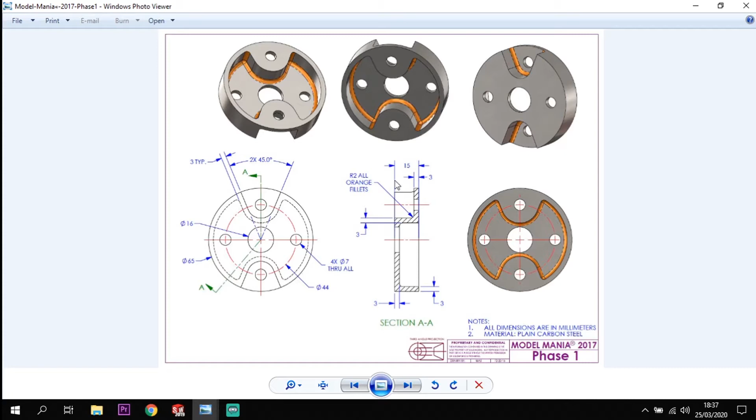So the first thing I'm going to do is do the extrusion for this main body section, this cylinder section. And then I'm going to put in my cutouts and I'm going to pattern them across. I am then also going to shell this main section out here and then put in my 4 holes as a circular pattern as well. So let's have a look. We'll jump into it and get going straight away.

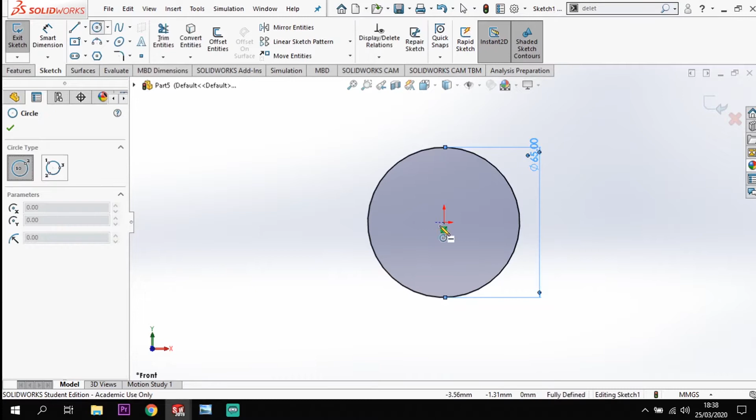Okay, so I'm going to start on the front plane. I'm going to sketch on there, and I'm going to create a circle. Now that circle is going to be 65 diameter. And I'm going to create another circle inside that, and that circle is going to be 16 diameter. So I'm going to extrude that, and I'm going to set the thickness of the extrusion to 15 millimeters.

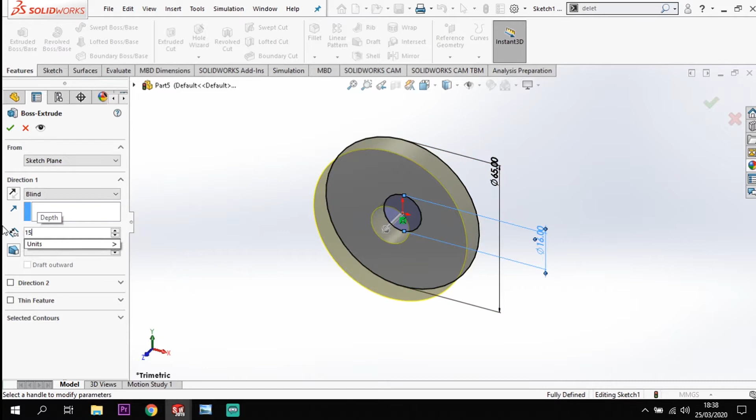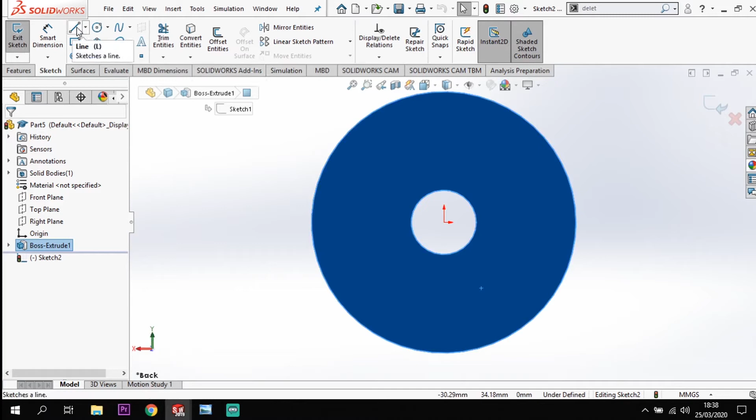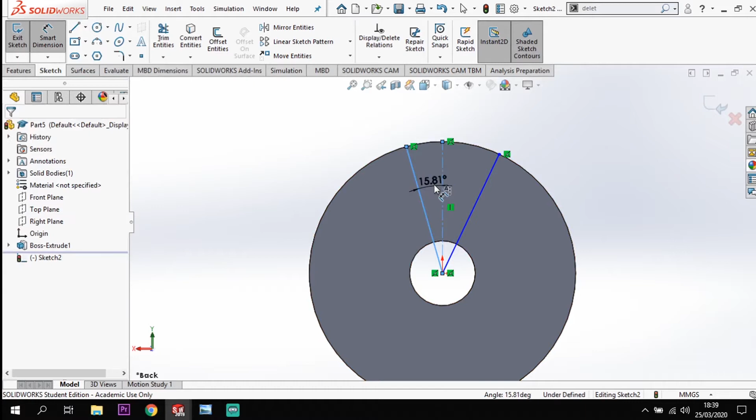Now with this I'm just going to flip it round, and on the back here I'm going to sketch, and I am going to create the cutout in here. So the way I'm going to do that is using 2 lines from the centre up to the outside edge. Same here as well, up to the centre, up to the outside edge. I'm going to set a centre line in there from straight up to the point at the top of the circle, like so. And then I can dimension these up for the angle. Now the 45 degree between the two, so it's 22.5 for one. And then between them is 45, and that sets that distance across.

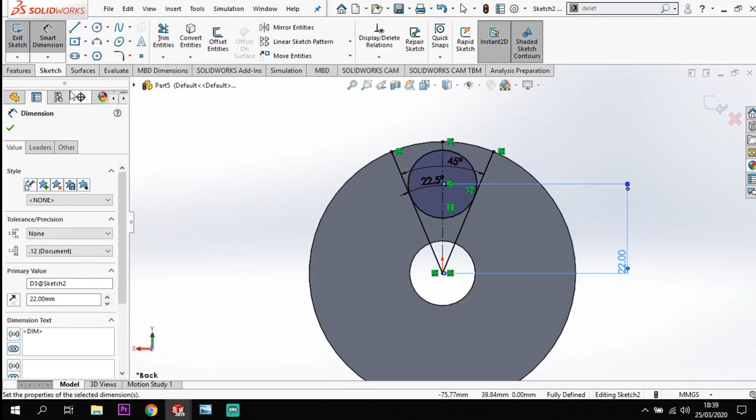Now I'm going to take a circle, I'm going to put it on this centre line, and I'm going to go out until it's a tangential relationship, like so. So I don't need to set the diameter, all I need to know is the distance up from the centre, which in this case is 22, like so. Now I've got that detail in, I can cut that shape out using the contours. So I don't need to delete anything.

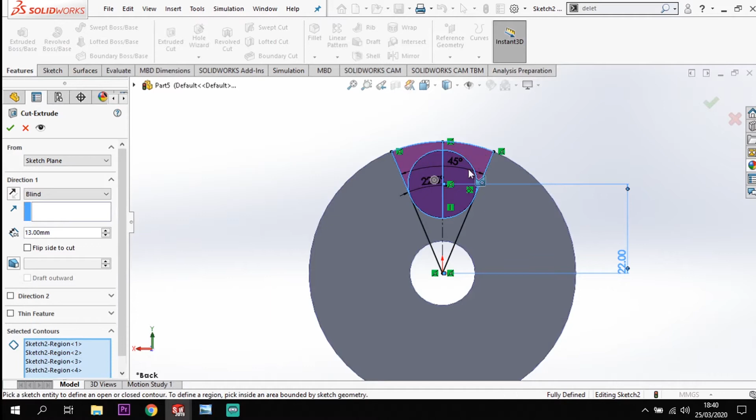I can go to features and I can go to cut. And I am going to select some contours in this bottom box here. I don't want it to be 15 anymore. I want it to be 13. And I'm going to select the contours that I want to get rid of. So them there. Turn that around and you can see that it's gone back into the model. Tick that like so.

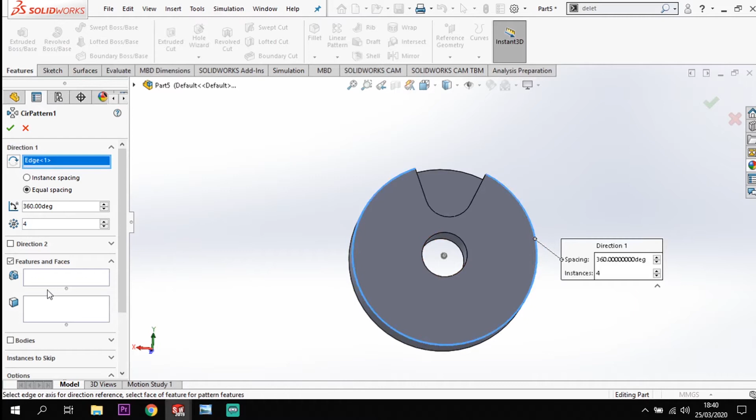Okay, I'm then going to pattern that to create the second one at the bottom. So, circular pattern. I'm going to pattern it around the outside edge, and I'm going to select a feature here of that extrude that I've already completed. Now I don't want 4 of them, I just want 2, so I'm just going to drop that down to 2. Make sure that they're equally spaced, and that'll split them apart exactly halfway, 180 degrees. Tick there, and I get that pattern on one side like so.

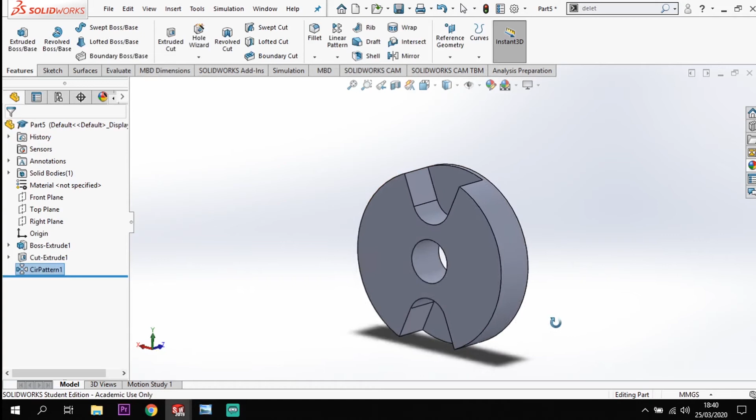I'm going to come around the other side, I'm going to click on that face, and I'm going to shell the other side. So shell, and I'm going to shell it with an offset of 3 mil. So the thickness of the material left over would be 3 mil. Tick there, and that'll shell that shape out. Now what we saw on the model before is we didn't have this, it was shelled all the way through. So I'm going to get rid of this.

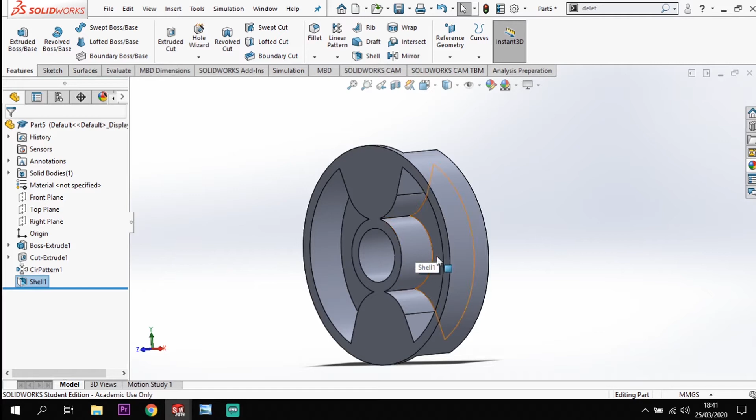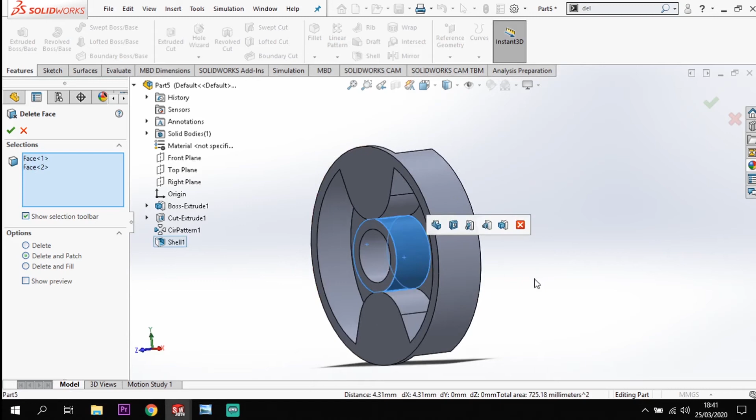Now I'll do that by deleting the faces. So if I go into my top box up here, I can delete, and I can delete a face. Now it is in there somewhere, I can never remember where it is, so I always just search for it at the top here. I'm going to click the faces that I want to delete, that one, and that one, like so. And I'm going to delete and patch, which means the bottom of this circle will patch around here. Tick there, get rid of that section in the middle, and that gives that flat surface at the bottom, like so.

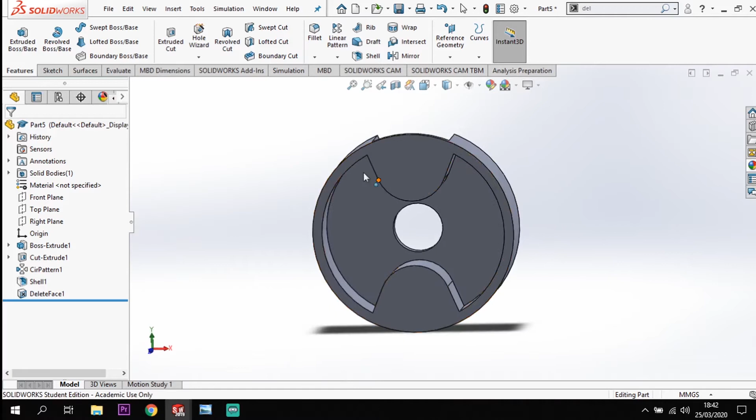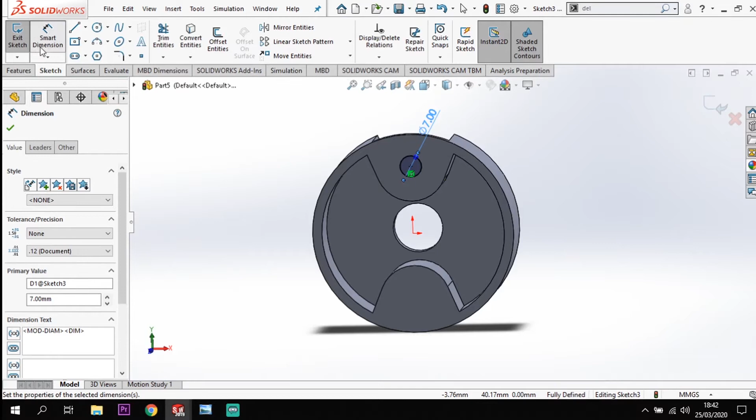Okay, so the last part to this for my extrudes is to put some holes in. So I'm going to go to sketch. I'm going to sketch on that face there, create a circle from the outside edge, and tick there at the top, like so. Now this is going to be a diameter of 7mm, so 7mm, and from there I'm going to features and cut that through.

Now I'm going to make sure that I select through all as my option, because I want it to go through the whole model to the other side, like so. Okay, tick there. So I've got that one. Now I'm going to repeat that around using the circular pattern. So circular pattern.

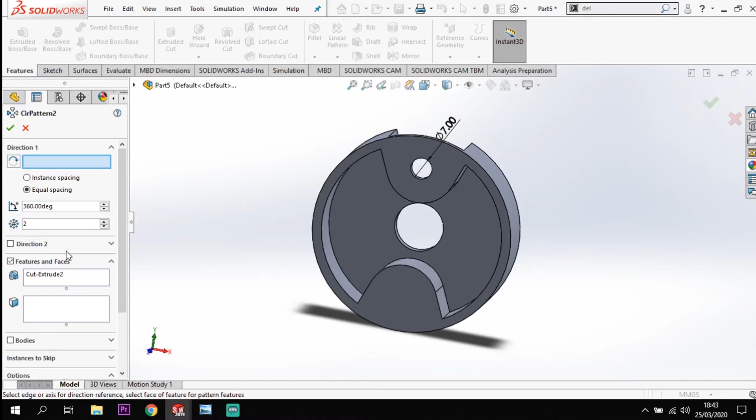It's automatically picked up that cut extrude because it was still selected in the design tree. I now want 4 of them, so change that to 4. And I'm going to click this outside edge here to get them all in place. Let's give it something to circular pattern around, which is giving me them 4 holes.

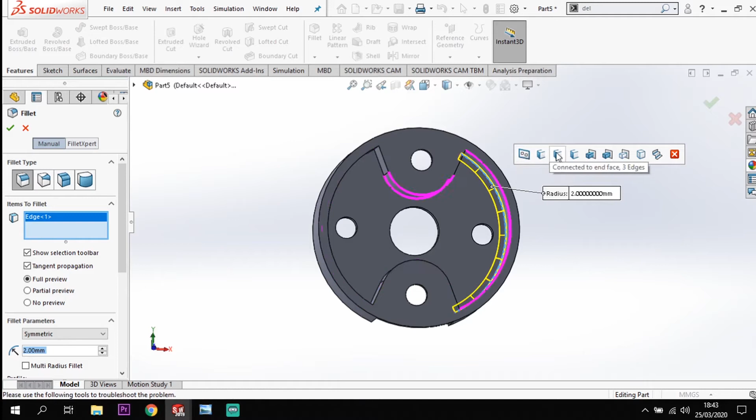Last part is just putting in my fillet, so I'm going to put a fillet in. Now my fillet is going to be 2mm, and I'm going to select this inside edge here. Now what you'll see now is that I get a range of options come up here on my fillets. Now these are effectively predictions. The software's trying to predict what other type of fillets I might want with this.

Now I want to fillet the inside edges of this, but also the inside edges of the other side. So what I'm going to use is the one that looks like a set of steps, all concave. Okay, and it'll pick up all the sections in relationship to that. So click that one. It picks up all the lines automatically for me. Just going to turn that round so you can see. And it's picked up all the edges that I want.

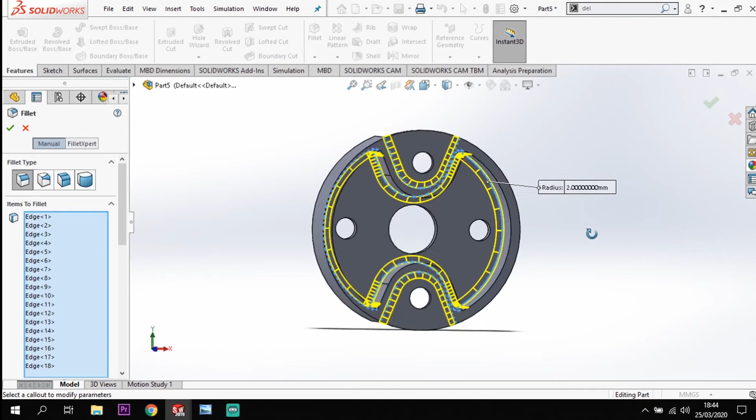Now if it doesn't give you the option that you want there, you'll just have to go around and click the lines that you want. It might give you most of them and then you just have to pick an extra few. But you should get quite a few from doing that prediction process. I'm going to tick there. And we've now got that model.

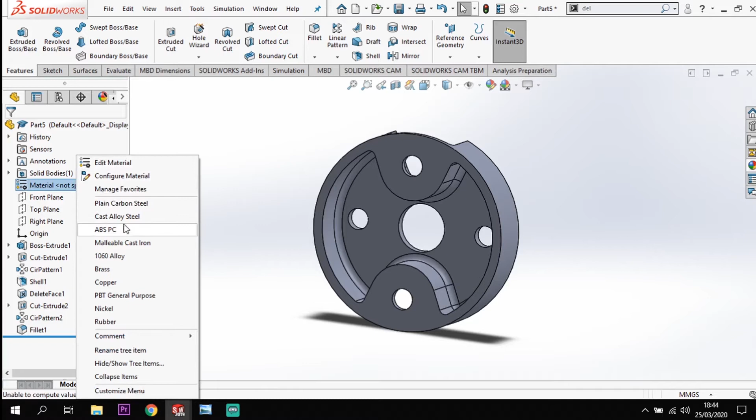The only bit now is to just put a material to this. So I'm going to go to material here. I'm going to edit material, but in this case, because this is a Model Mania model, anything that is used on Model Mania is always in the favourite section here. Now this material is going to be plain carbon steel. So I'm just going to select plain carbon steel for this model.

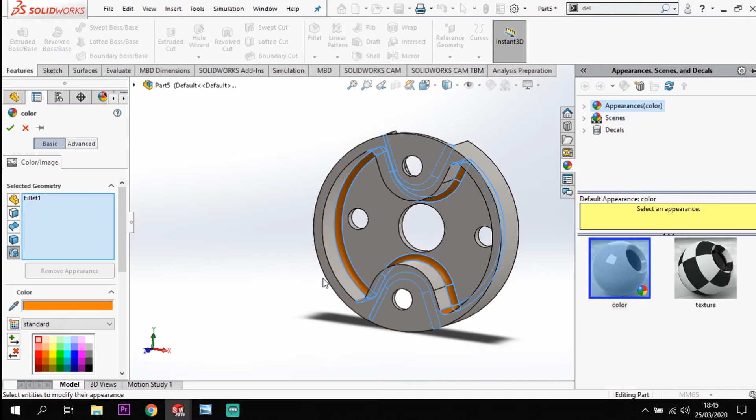I'm then going to pick the fillet just to highlight them. It's the same way it is on the model, and I'm going to select the fillet. And I'm just going to change the colour there to that orange colour that we get, like so, and tick. So you can see all of the fillets there are now in orange. Okay, so that's section 1 completed.

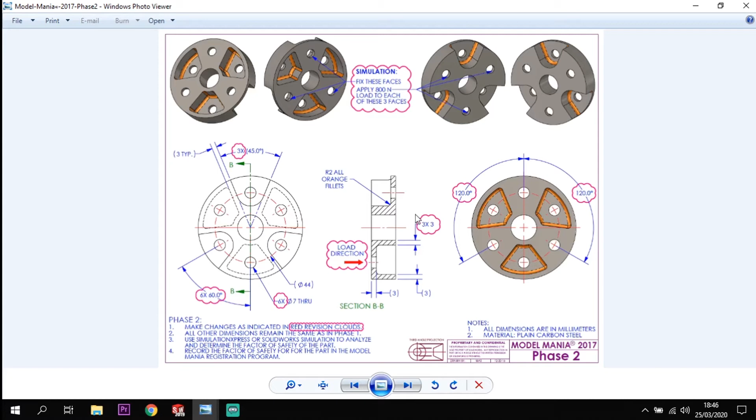So section 2 here looks at the modifications we need to make to this model. So now rather than having the 2 grooves in here, we're going to have 3, and the same on the other side. Rather than having that one large shell, we're going to have 3 sections. So we'll have to have a look at that. The holes increase from 4 to 6, and we're also going to do a simulation on this product, so we'll have to run through a simulation as well. Okay, so let's have a go. So the simulation is going to be 800 newtons on each of the holes in there.

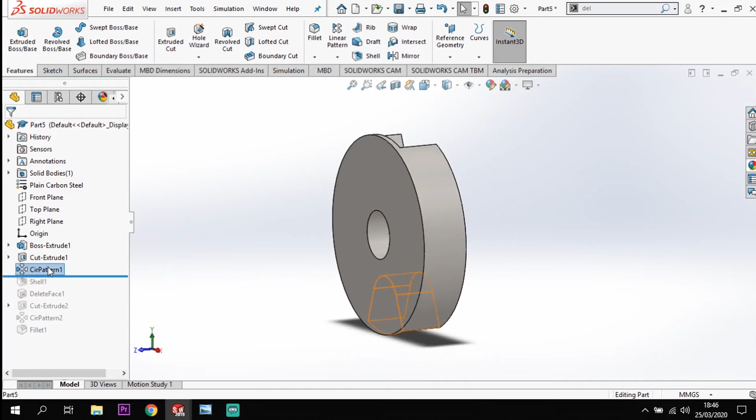Now you see here I've got them fillets on there, so with this I'm now going to look at how I would modify it. So the first thing I'm going to do is roll this back to my first pattern here, where I've got the 2. I'm going to edit that pattern to 3. Like so. Okay, so we've got them 3 in there now. If I drop that down for the shell, we'll now get the 3 sections. However, we've got a bit of an issue because these curve off at the bottom.

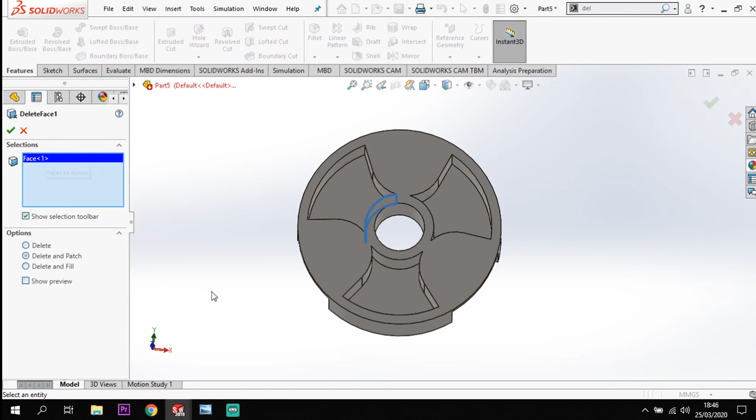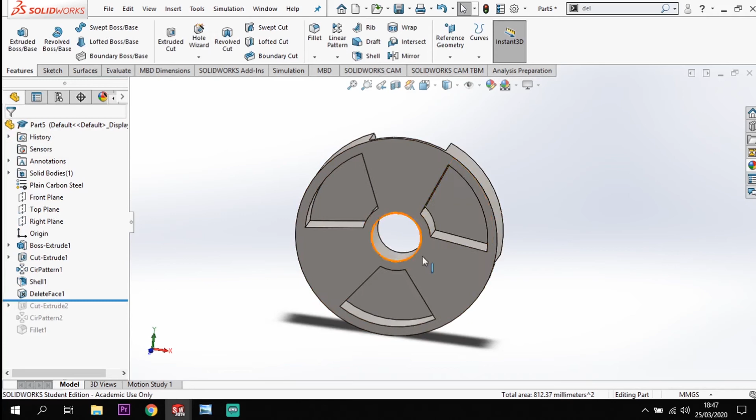So I'm going to go to the delete faces. Now this has come up with an error because there's now more faces to delete than what there was before. So I'm just going to right click on this, edit that. I'm going to get rid of that option there, and what I'm now going to click are these radiuses here on the inside. Selecting them like so, and delete them. Bringing that in perfectly to make it flat to this circle so it comes straight down, which is what we're expecting to see from that view of that new feature.

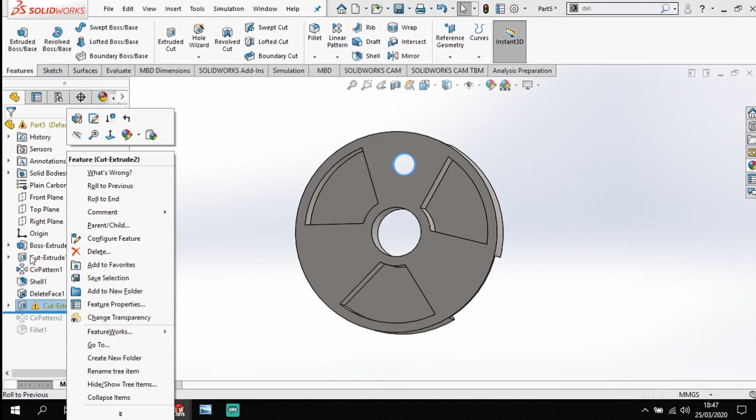So now we've got that, I'm going to pull this down again. We've still got our hole in place. I'm just going to look at that. It's throwing up an error, so let's have a look at what is throwing up an error. Edit the sketch. Okay, so it's just picking up on a relationship error with a center there. So I'm going to delete that.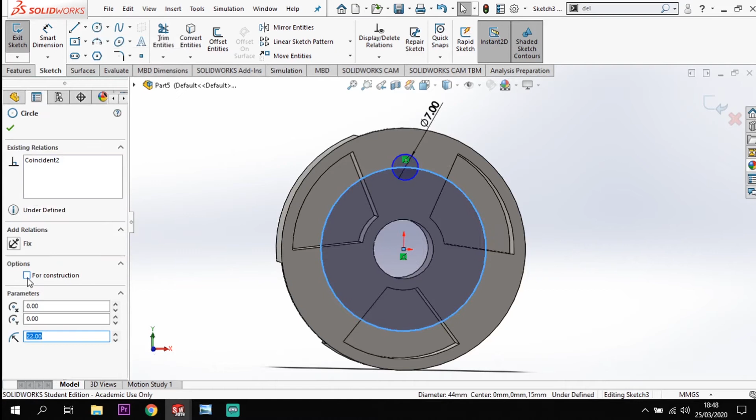I'm going to put a circle in from the center out to there. I'm going to set that circle as a construction line and set it to 44 diameter, which is the same position out as what the circle was related to previously. Okay, I'm just going to make sure that it's vertical to our origin, and now that should be fully defined. Pop back out of there.

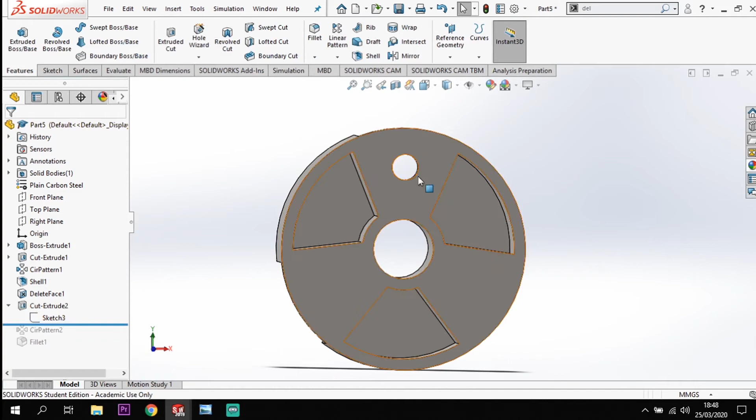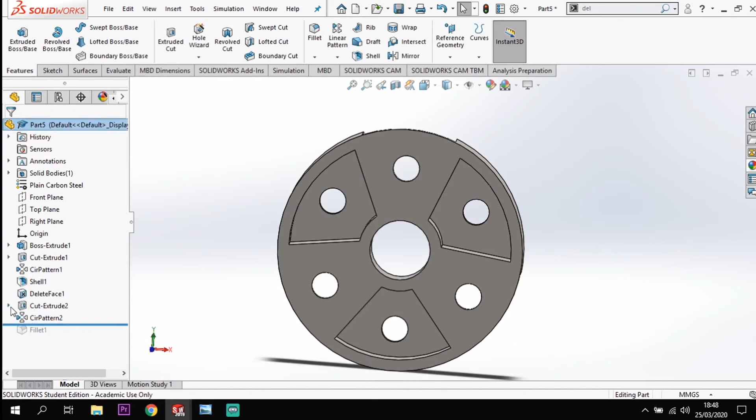Now I've got my circle in the right place, so I'm going to pop down now and get my pattern. It's still showing me 4. I'm going to right click on that, edit the pattern, and change the 4 up to 6 and tick there, giving me the 6 holes through. Okay, as long as I'm using these pattern features rather than pattern sketches, it makes it really easy to edit.

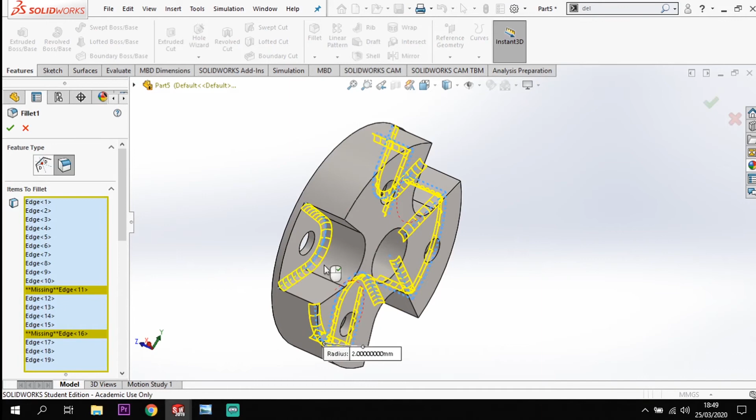Last part is just this fillet. It's going to throw up a couple of errors possibly because it's not quite picked up every part, so we'll have another look. So let's go in here, edit feature. So we've got a few there that it's not showing up. So let's chuck the rest of these in. So that's in there, that's in. Pull around the other side.

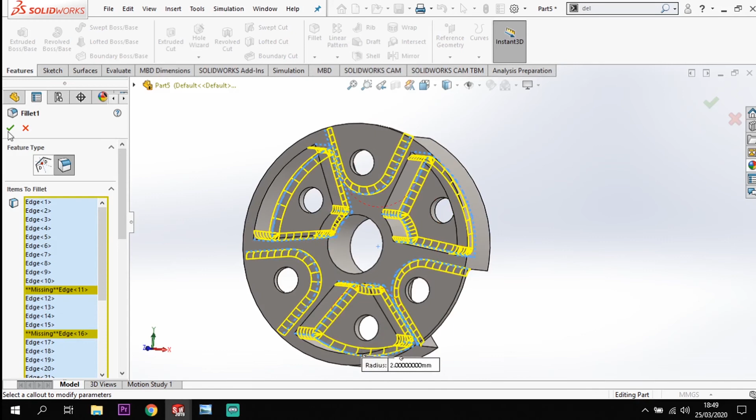Make sure everything's selected. There we go, that option just came up again to do the step process. Make sure that everything's selected, and I'm just going to tick there. Now it's going to throw up an error saying there's some missing edges. It doesn't matter for this. As soon as I click that's fine, it'll tell me that it wants to remove and replace them, so it will do that automatically. They won't matter.

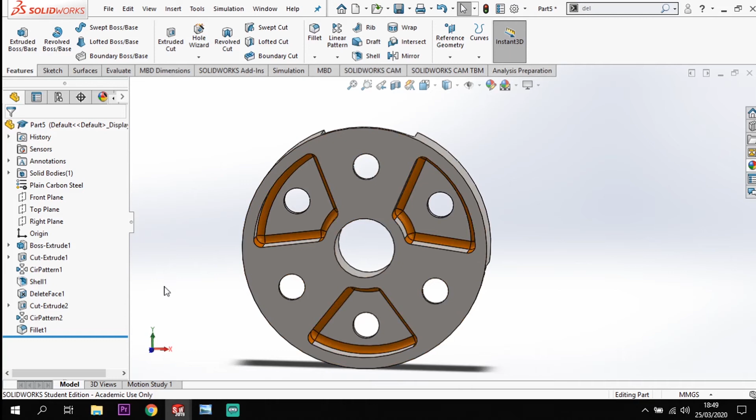Tick there, and it's not showing an error anymore on the fillet. All of the fillets are still orange. Our material is still plain carbon steel. So now at this point what I'm going to be doing is running my simulation. So I want to spin this around because I want to run my simulation using this face.

So I'm going to go to my simulations tab, which is on here, simulations. I'm going to go to a new study. And I want to complete a static study. At the moment it is static, so I'm going to use that one. Okay, so the first thing I need to do is make sure my material's set. It's set in here, plain carbon steel. I'm going to add some fixtures in.

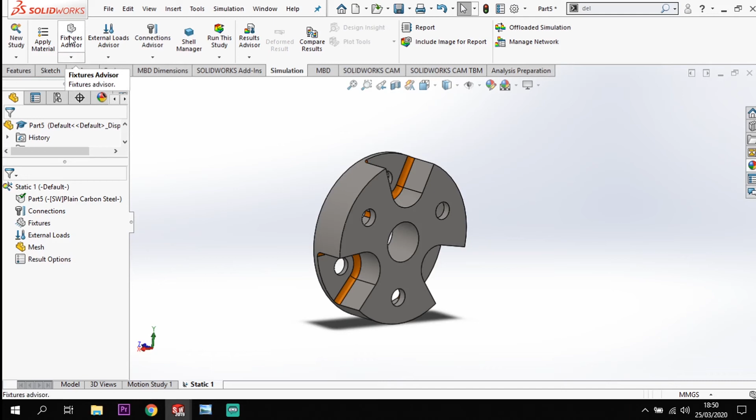So my fixtures are going to be on the opposite side. So my fixtures are going to be in here. So I'm going to set a fixture in each of these circles here. Zoom in. Fixtures. I'm going to go a fixed geometry. And I want that inside edge, and that inside edge, like so. Okay, tick there.

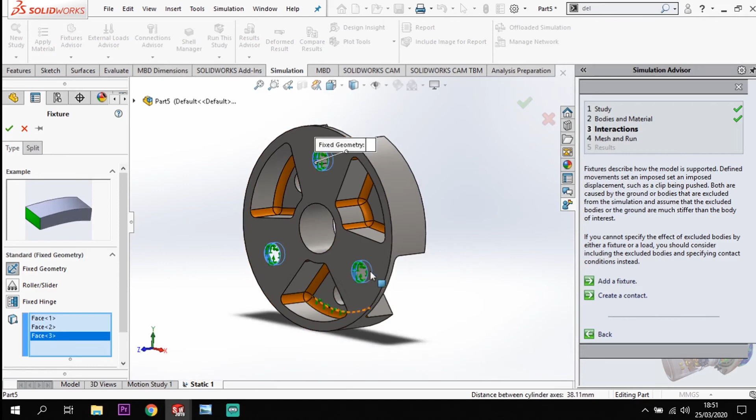I want to add a force on the other side, so I'm going to go forces. I don't want it to be a singular force, so I want to select the direction of my force, which is going to be selected in relationship to there. And I'm going to apply a force per item, not individually, and I want it to be on, sorry, there. Oh, sorry, I've selected the wrong thing. There we go. So select these there, there, and there.

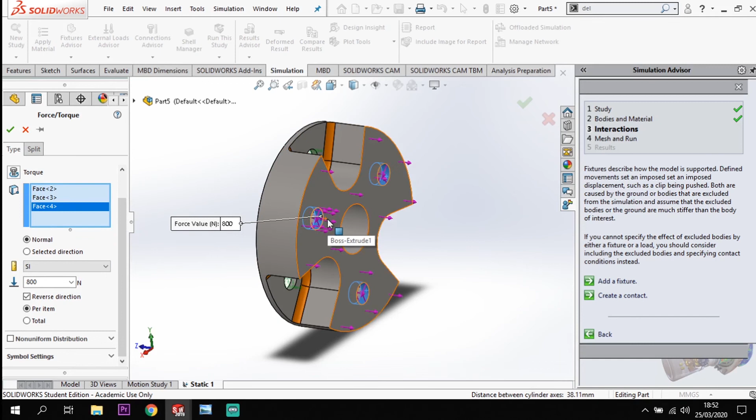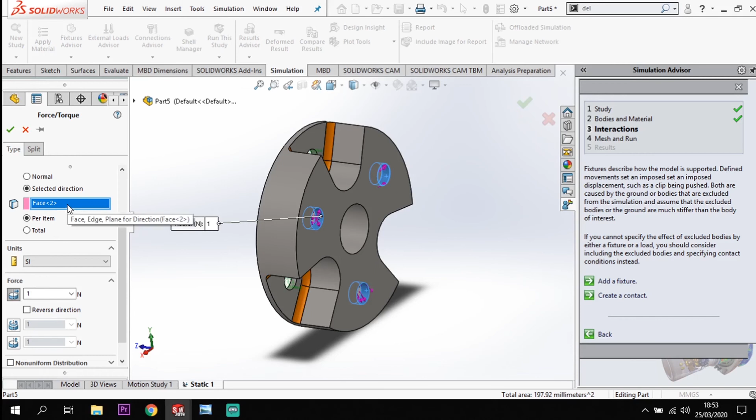Normal to them. I want 800 newtons per item, not total. But I want the direction. Now, what I'm going to do is set a direction in relationship to them holes. So select the direction. In relationship to there, and I want it to go, oh sorry, not in relation to that, let's delete this bit here, in relationship to this face, and I'm going to go in that direction, like so.

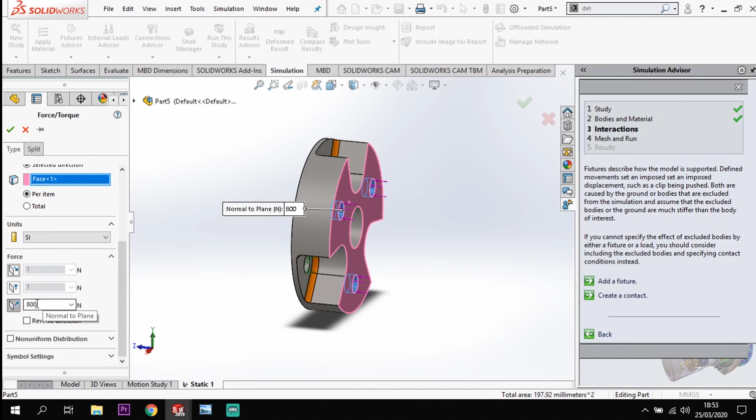Now I want it to be 800 newtons. There we go. Now we've got set up. I don't want that one selected, so I'm just after this bottom one, making sure that they're all going towards the face. I want each to be 800 newtons, set per item. It's set in direction to that face, but through them holes. Once I've got that set up, just a tick at the top, and we're happy with that.

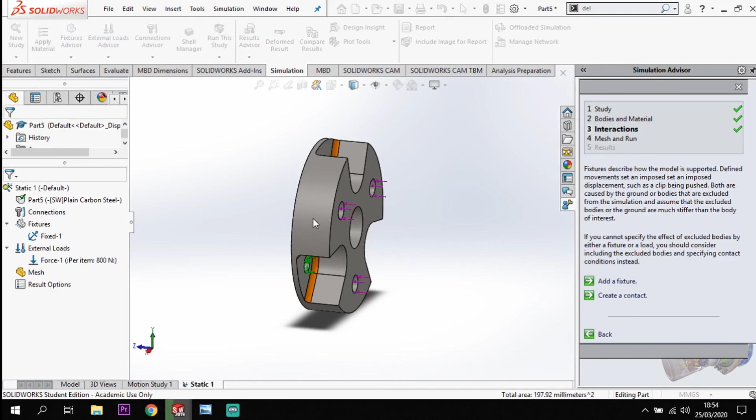Now, what I need to set up here is a mesh, so I'm just going to right click on the mesh, and I'm going to create a mesh. What I can do with this mesh is set the different coarseness of the mesh. Because of this type of model, I'm just going to leave it where it is. Tick at the top, and then give it a second to create the mesh, like so here. So it's created our mesh and our model, and now we can run our study.

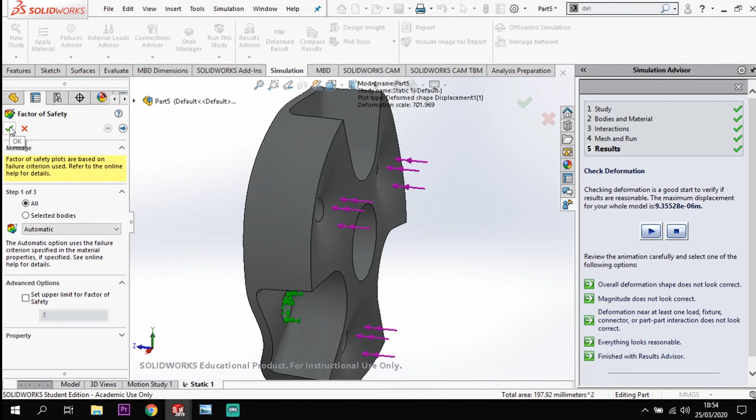This will just take a second. It will go through the process of calculating all the forces that are acting on this model due to the material, and then give us an output. Now it's given us an output here in terms of stress, displacement, strain, second displacement value at the bottom. I also want a report in terms of factor of safety. So I'm just going to right click on my results. I'm going to go up here and find factor of safety. Tick there. And it'll put me a factor of safety plot on for this model.

And it's coming out with a factor of safety of exactly 2 for the forces applied on here. Okay. Now that's what the model asked me to do. The project asked me to find out the factor of safety for this. So my factor of safety is 2 in terms of this model. Right, so taking you through there for the full modelling process and also finding the factor of safety at the end. Hopefully you've learnt something from that, and if not, at least it's helped you to actually run through this Model Mania model.